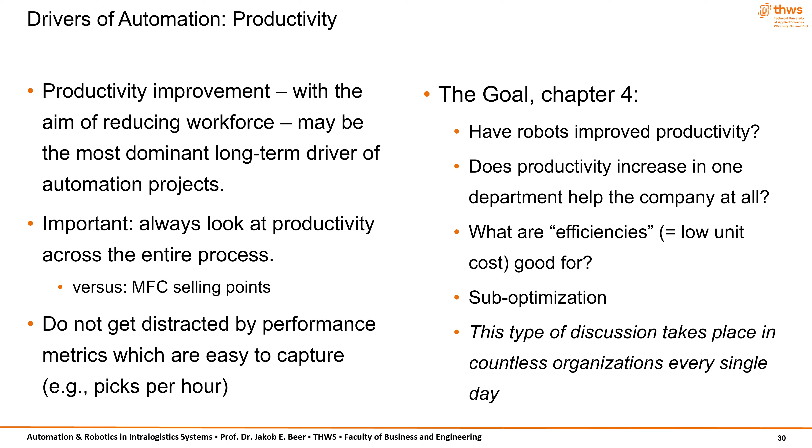Since automation business cases are usually built on productivity improvements, it's essential to take a holistic view. A positive business case exists if, on average, warehouse or factory employees become significantly more productive across all process steps, not just in isolated activities, leading to a measurable reduction in operational expenses. If cost savings are insufficient to justify the automation investment within a defined payback period, the business case may not hold. However, in some cases, other strategic factors can justify proceeding with automation despite a weak financial return.

Next, ergonomics. Productivity is not the only reason for automating material flow systems. Ergonomics can be a crucial factor as well. In some cases, automation is not justified by productivity gains alone, but is instead driven by ergonomic considerations or legal regulations. In such scenarios, automation becomes a necessity rather than a choice.

Ergonomics can directly drive automation when certain manual tasks are physically unfeasible without mechanical support. Tasks that require excessive lifting, repetitive movements, or exposure to extreme conditions may necessitate automated solutions. But ergonomics also serves as an indirect driver of automation by influencing labor productivity.

Government regulations, union agreements, and corporate policies impose restrictions such as maximum lifting limits per object or per work shift, or time constraints in extreme environments. In deep freeze warehouses, for example, workers must take mandatory breaks after a certain exposure period. These regulations reduce the effective working time of manual labor, making automation a more attractive investment to maintain productivity.

Ergonomic requirements vary significantly by country. Some nations have stricter regulations, while others have more lenient policies. Additionally, factors such as unionization and corporate culture play a role in determining the extent to which companies prioritize worker well-being. Scandinavian countries, particularly Denmark, are known for their stringent ergonomic regulations. These requirements extend beyond general workplace safety and influence how automation projects are designed and implemented.

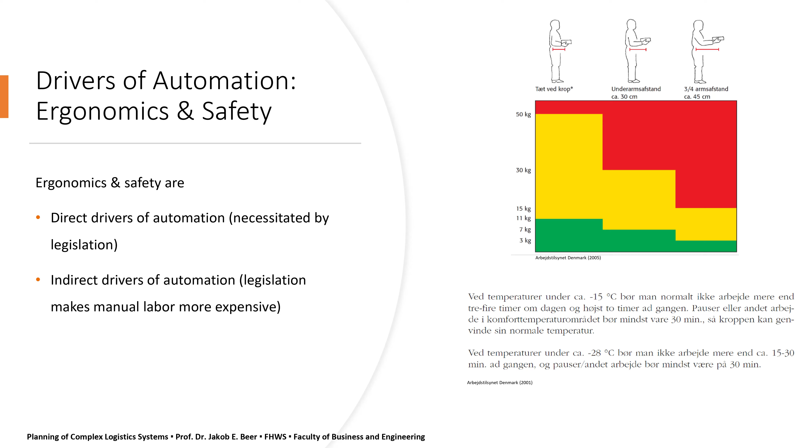Ergonomic requirements can be both an opportunity and a challenge for automation projects. Strict regulations often justify automation investments, but failure to fully understand these rules can lead to unexpected costs. Companies operating in highly regulated environments must proactively account for ergonomic compliance to avoid costly redesigns or legal complications.

The next driver: quality. Another important driver of automation is quality. Like performance or productivity, quality is a term we use frequently without always defining it.

In fact, we could dedicate an entire course to quality management, but in the context of automation, we can keep it brief. Quality is often assumed to be universally understood, yet its meaning is highly subjective. We talk about quality food, quality services, or quality products like cars, and while the definition remains vague, people generally understand each other. However,

What qualifies as high quality depends on the criteria used. A fashion expert might dismiss my expensive brand name shirt as low quality based on fabric composition and stitching, even though I assumed it was excellent. The same holds true for products like cars, where one aspect, such as engine performance, may be outstanding, while another, such as interior materials, feels cheap.

If that engine breaks after 50,000 kilometers, but the supposedly low-quality interior lasts 1,000,000 kilometers unchanged, was it a high-quality car or not? Although quality is subjective, once properly defined, it can be measured objectively.

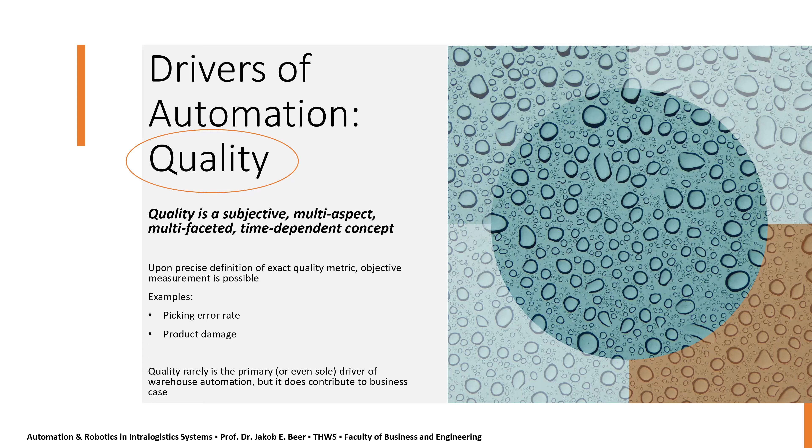Their impact can be quantified, or at least estimated, but in most cases, they support automation rather than drive it outright. But let's talk a bit more about quality.

We can summarize quality as follows. Quality is subjective. Perceptions of quality depend on knowledge. Experts or producers often understand a product's quality in ways a layperson might not. Quality depends on the aspect being evaluated. For example, some might call a Dacia a low-quality car. But is it really? A Dacia is an affordable, practical vehicle that serves the commuting needs of most people. If it fulfills its purpose effectively, can we still call it low quality?

The same applies to food. Some foods taste great, but are loaded with preservatives and unhealthy additives. Others are extremely healthy, but taste awful. Which one is higher quality? Ethical considerations also play a role. Was the food produced under humane conditions, or does it come from unethical mass farming?

Beyond the product itself, we can evaluate quality from various perspectives. Health aspects: is the product beneficial or harmful in the long run? Environmental aspects: does it have a sustainable footprint? Ethical aspects: consider supply chain ethics, such as labor conditions in manufacturing.

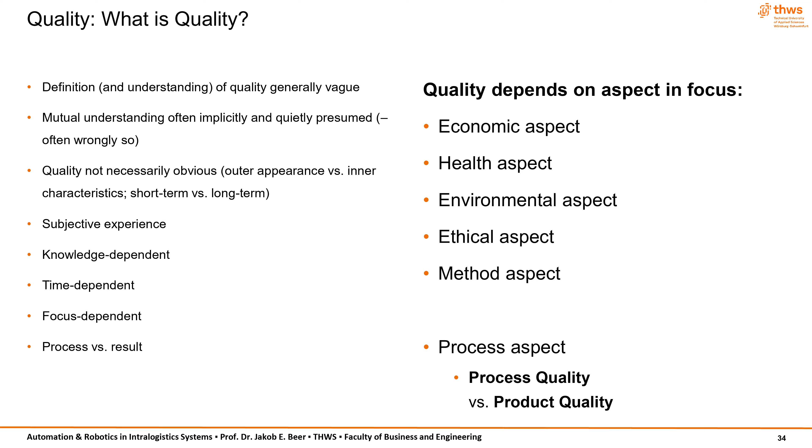will sharpen your ability to critically assess any quality-related initiative or strategy in your organization. The American Society for Quality, ASQ, defines quality as the totality of features and characteristics of a product or service that bears on its ability to satisfy stated or implied needs. This definition is broad enough to cover the aspects we discussed, but its breadth is exactly why you must remember the nuances. Quality is never just one thing. It is always a combination of perspectives.

Let's move to the next driver of automation: theft and breakage. Another factor that can drive automation is theft and breakage.

If you've ever worked in a warehouse, and I highly recommend doing so for a few weeks to gain first-hand experience, you'll know that it can be a tough environment. If you're looking for a holiday job, consider working in a warehouse. It will give you valuable insights. In some warehouses, workers receive performance-based bonuses for achieving high pick rates. This creates pressure to work quickly, which sometimes leads to rough handling and accidental damage.

However, as we already discussed in the context of quality, product breakage is usually unintentional. Deliberate damage to products or equipment is rare. For some industries, theft is a far bigger concern, especially for high-value items. To mitigate this, companies often store valuable goods like tobacco, alcohol, jewelry, pharmaceuticals, or precision machine parts in restricted access areas. These items can be worth thousands of euros, and if they can be picked, they can be stolen.

Conducting security checks, such as frisking employees at the end of their shifts, is costly, time-consuming, and negatively impacts employee satisfaction and trust. Automation offers an alternative. High-value products can be stored in automated systems, restricting manual access. When picking occurs at goods-to-person stations, security measures can be implemented more effectively and with less disruption.

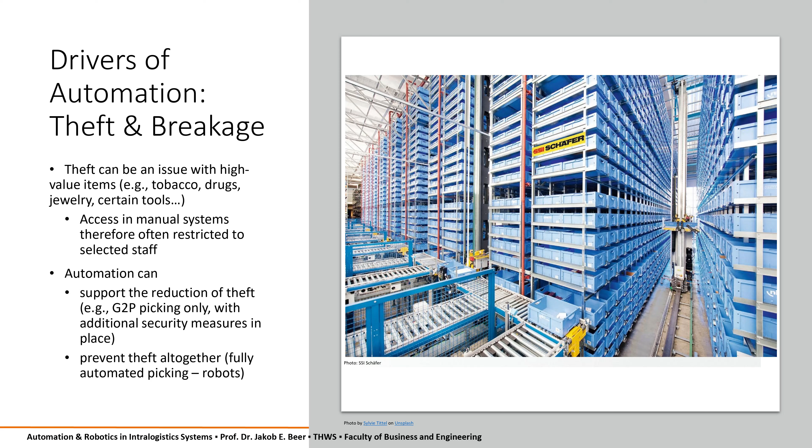In some cases, picking can even be fully automated. Advances in piece-picking robots capable of identifying, grasping, and placing individual items of varying shapes, sizes, and weights, have made fully automated picking increasingly viable. As with quality, theft and breakage alone are rarely strong enough reasons to justify automation, but they can strengthen the business case by reducing losses and improving security.

Next up, scarcity of labor.

While automation is often discussed in the context of cost savings and efficiency, an increasingly relevant factor is the availability or lack of workers. This point is related to, but not identical with, productivity as a driver of automation.

This means that businesses in these regions are struggling to find workers, leading them to seek alternative solutions, such as automation. And this is in spite of the fact that countries like Hungary and Czech Republic have relatively moderate labor costs by our standards.

Traditionally, automation has been justified through a financial business case: reducing labor costs, improving efficiency, or increasing throughput. However, in economies with consistently low unemployment, businesses face labor shortages, which means automation is sometimes adopted out of necessity rather than just for cost reduction.

Let's shift our focus to the facilitators of automation. Factors that support the business case for automation, but are not, by themselves, sufficient to justify investment in automation technology. Think of these facilitators as conditions that make automation more viable. A company might want to automate, but if these conditions are not present, the business case might not be strong enough to proceed.

Facilitators of automation are conditions that either support the financial and operational feasibility of automation, or may be required for automation to be effective. However, just because these conditions exist does not mean automation is always the right choice. They are necessary but not sufficient. Other factors like cost, scalability, and risk also play a role in the decision. Now let's go through three major facilitators of automation.

First, long operating hours. One of the most important factors that makes automation more viable is long operating hours. Automation typically requires high initial investment, so for it to be economically justifiable, companies need to maximize their utilization of the system. If a facility operates only one shift per day, automation may not deliver a strong return on investment. However, when a facility runs for 2 or more shifts per day, automation becomes significantly more attractive.

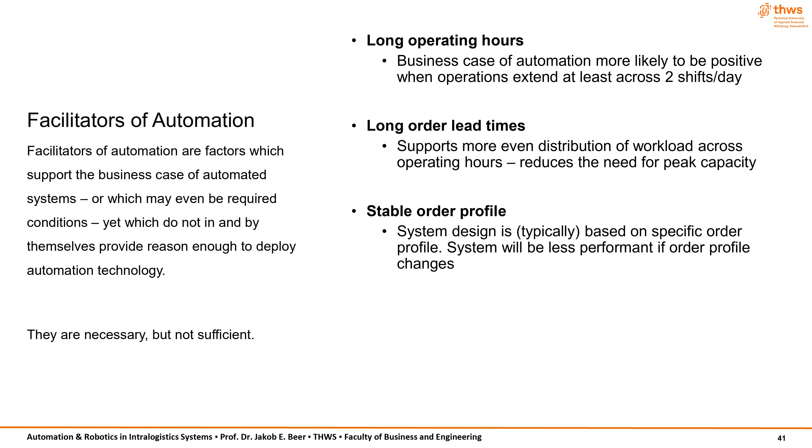To summarize, automation is most effective when operations run multiple shifts per day, maximizing system utilization; orders have long lead times, allowing workloads to be smoothed out; and the order profile is stable, ensuring system efficiency over time. While these factors support automation, they do not automatically justify it. Businesses must still evaluate costs, risks, and long-term flexibility before deciding to automate.